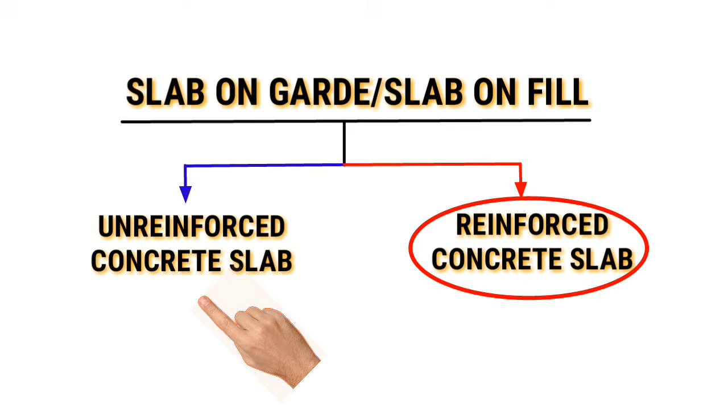Ang ituturo kong strategy sa inyo kung paano mag-estimate ng bakal para sa slab ay ang direct counting. Meron tayong two option para bilangin yung mga bakal. Pwede niyong bilangin ito per room o pwede naman i-consider na lang yung buong floor area kung typical yung design ng slab. By the way, ang spacing ng ating bakal para sa ating SOG ay 0.4 meter both ways at

10 mm in diameter. And take note, pagdating sa slab on grade, pwede kayong mag-splice kung saan niyo gustuhin. Malaya kayong makakapag-splice unlike sa suspended slab, beams, column, na kailangan pa natin sundin yung mga tamang location at i-identify kung saan yung tension or compression.

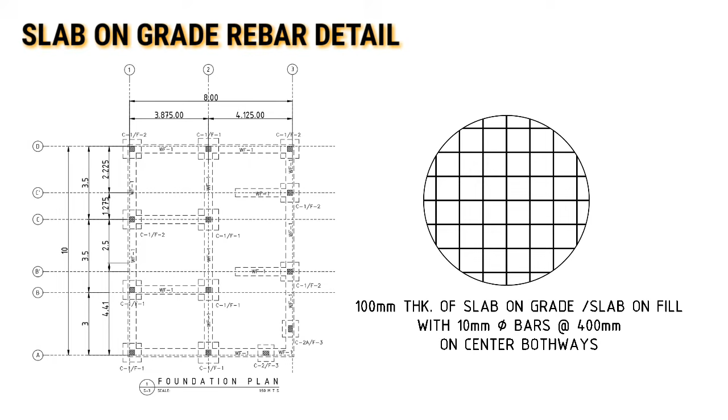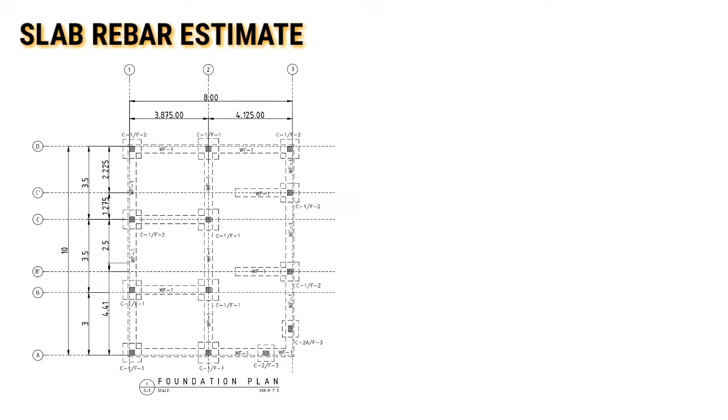Okay, let's consider the whole area, 8 meters by 10 meters. Bilangin muna natin kung ilan yung papasok na bakal sa bawat sides nito. Unahin natin yung bakal na parallel sa 8 meters. Number of rebar, that is equal to 10 meters divided by 0.4 na spacing plus 1. That is equal to 26 pieces.

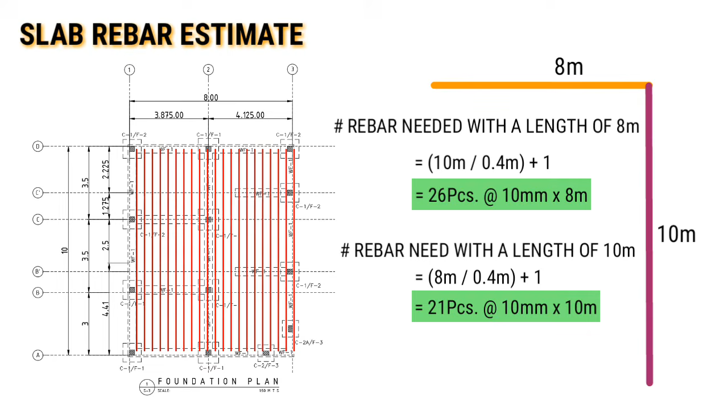Next, yung bakal naman parallel sa 10 meters. Number of rebars, that is equal to 8 meters divided by 0.4 plus 1, and that is equal to 21 pieces. Ang susunod naman natin alamin kung ilang 6 meters o 7.5 meters ang magagamit natin para mabuo natin yung haba na 8 meters at 10 meters.

Unahin natin yung 8 meters. Let's try 6 meters na bakal. So, remaining, that is equal to 8 meters minus 6 meters plus 0.4 para sa ating splicing length, and that is equal to 2.4 meters.

So, let's find out kung saan natin kukunin yung 2.4 meters na remaining natin. Here's the cutting list. 6 divided by 2.4, and that is equal to 2.5 pieces, so say 2 pieces. Meron tayong wastage length na 1.2 meter. For 7.5 naman, divided by 2.4, meron tayong makukuha na 3.13 pieces o 3 pieces. Meron naman tong wastage na 0.3 meter.

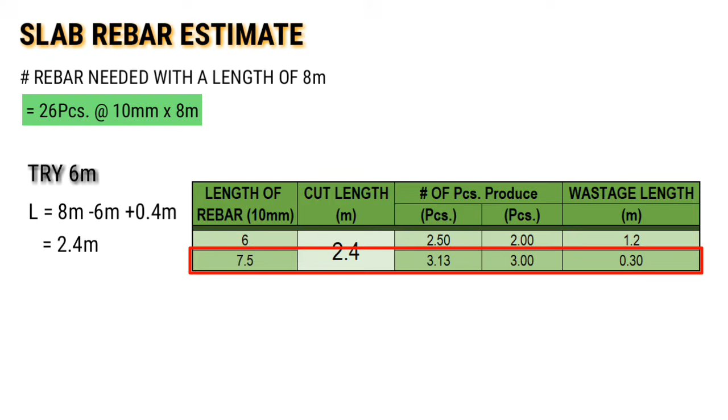Base sa result, sa 7.5 natin kukunin yung 2.4 meters na kailangan pa natin para mabuo natin yung 8 meters. Kung gagamit tayo ng 6 meters na buo at magdudugtong tayo ng 2.4 meters na kukunin natin sa 7.5, kakailanganin natin ng 26 pieces na 10 mm by 6 meters at 9 pieces na 10 mm by 7.5.

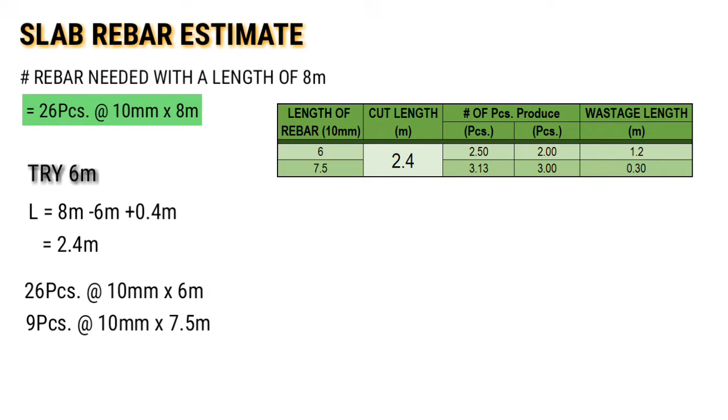Paano nakuha yung 9 pieces na 10 mm by 7.5 meters? Ganito yan. 26 pieces na 2.4 meter ang haba na kailangan natin idugtong sa 6 meters, i-divide natin sa 3. Dahil sa bawat piraso ng 7.5 meters, makakakuha tayo ng 3 pirasong 2.4 meters. So, 26 divided by 3, and that is equal to 8.66 pieces. Let's say 9 pieces.

What if 6 meters lang yung bakal na available sa inyong lugar? Ganito ang gawin natin. Instead of 26 divided by 3, magiging 26 divided by 2 na siya. That is equal to 13 pieces na 10 mm by 6 meters. But may wastage itong 1.2 meter, so pwede ninyo itong gamitin para sa dowel bar ng concrete hollow blocks.

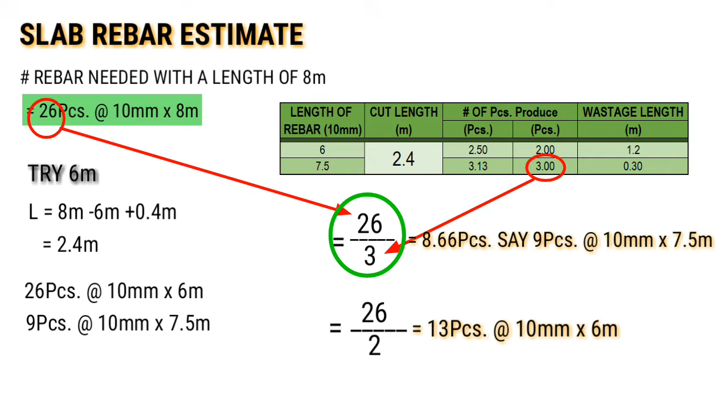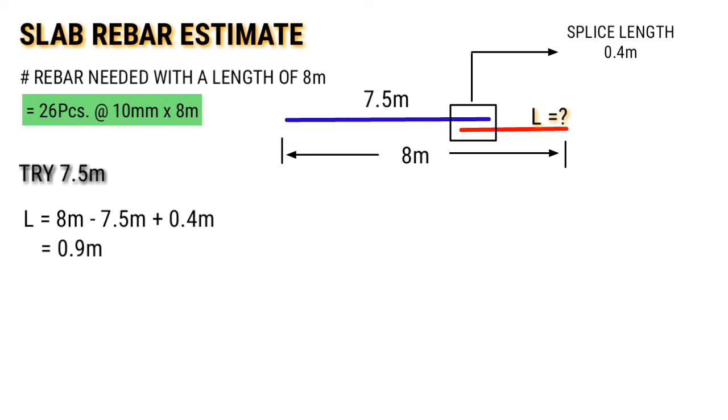Let's try naman kung 7.5 yung gawin natin buo. So, remaining, that is equal to 8 meters minus 7.5 plus 0.4 meter for splicing length, and that is equal to 0.9 meters. Kailangan pa natin ng 0.9 meters na haba ng bakal para idugtong sa 7.5 meters.

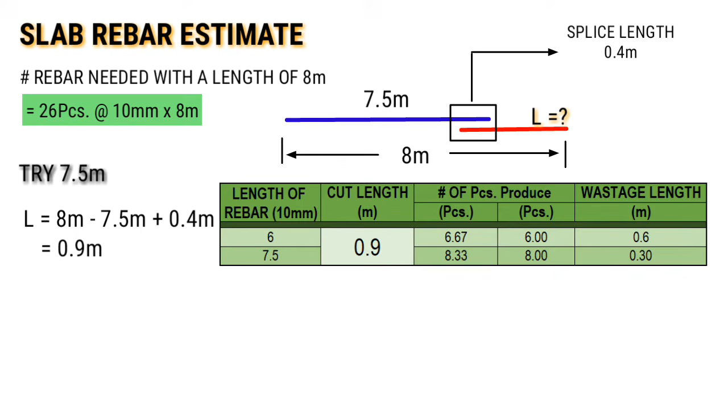Here's the cutting list. Base dito sa result, sa 7.5 natin, kukunin yung 0.9 meters na kailangan pa natin para mabuo yung 8 meters. Kung gagamit tayo ng 7.5 meters na buo, dudugtungan natin ito na 0.9 meters na kukunin natin sa 7.5. Kailangan natin ng 30 pieces na 10 mm by 7.5 meters.

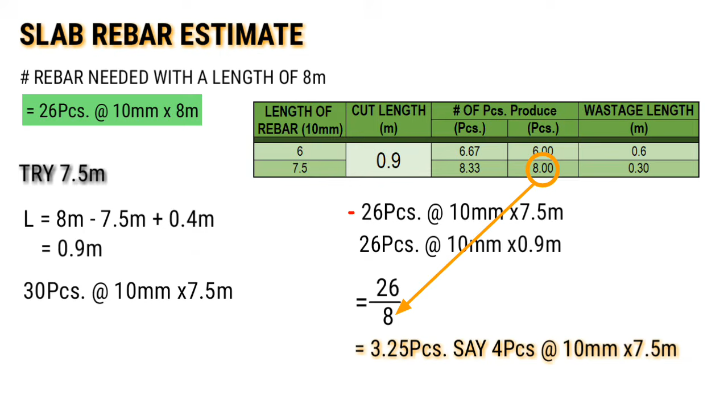Paano nakuha itong 30 pieces na ito? We have 26 pieces na 10 mm by 7.5 meters na buo at 26 pieces na 10 mm by 0.9 ang haba. So, 26 divided by 8, dahil sa bawat 7.5 meters na bakal, makakakuha tayo ng 8 pieces na 0.9 and that is equal to 3.25 pieces. Let's say 4 pieces. So, 26 plus 4 and that is equal to 30 pieces.

Ang tanong, paano natin malaman kung alin sa dalawang estimate na cutting list ang ginawa natin ang makakapagbigay ng mas mababang price? Para malaman natin kung saan tayo mas makakatipid, i-compute natin yung weight ng bakal.

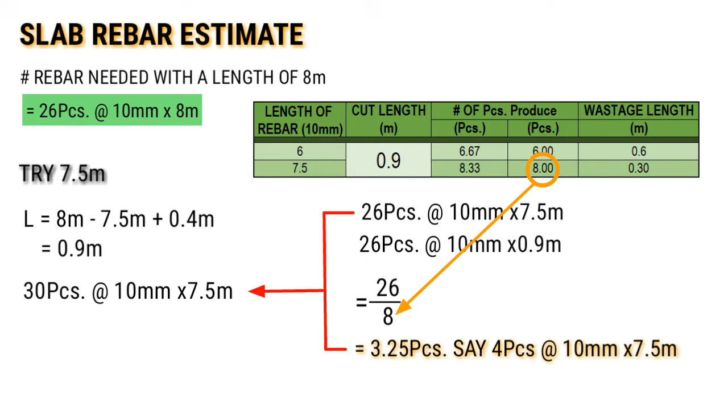So we have option 1 na 26 pieces na 10mm by 6 meters at 9 pieces na 10mm by 7.5 meters. Weight 1 equals 26 multiplied by 6 meters multiplied by 0.616, equals 96.1 kilograms. Weight 2 equals 9 pieces multiplied by 7.5 meters multiplied by 0.616, equals 41.58 kilograms. Total weight equals 96.1 plus 41.58.

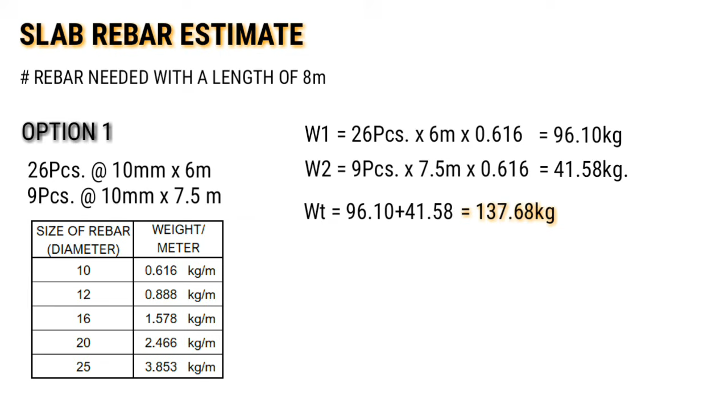Equals 137.68 kilograms. Dumako naman tayo sa option 2 na may 30 pieces na 10mm by 7.5. Total weight equals 30 pieces multiplied by 7.5 multiplied by 0.616, equals 138.6 kilograms. Base sa result, mas makakatipid tayo kung gagamit tayo ng 26 pieces na 10mm by 6 meters at 9 pieces na 10mm by 7.5 meters.

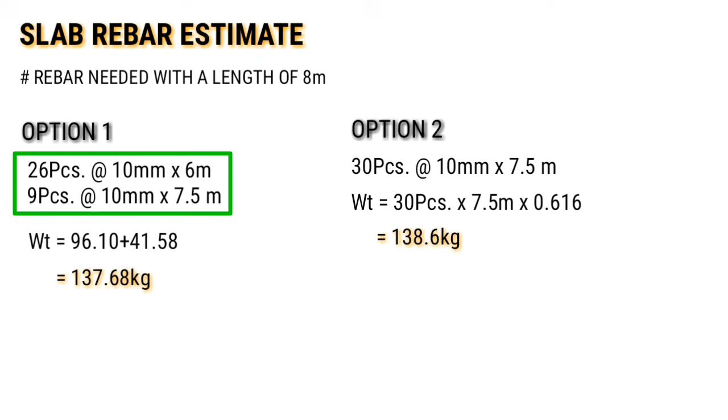Dumako naman tayo sa 10 meters na haba. Same process din yung ginawa natin nung una. Ito yung result, meron tayo ditong option 1.

Remaining length equals 10 meters minus 6 meters. Ibig sabihin, gagamit tayo ng 6 meters na buo plus 0.4 meter para sa ating splicing length, equals 4.4 meters. Itong 4.4 meters na ito yung idudugtong natin dito sa 6 meters para mabuo natin itong 10 meters na requirement natin. Ito yung ating cutting list.

Base dito sa cutting list, ang mag-govern dito yung 6 meters kasi mas maiksi yung wastage nito. So rebar needed equals 42 pieces na 10mm by 6 meters. Ang tanong, paano natin nakuha yung 42 pieces na yan?

Ganito lang yan. 8 meters, yung lalatagan natin ng 10 meters na bakal. Di-divide lang natin sa spacing ng ating rebars na 0.4 plus 1 tayo, equals 21 pieces. Kailangan natin ng 21 pieces na 10 meters ang haba.

Since ang available lamang na bakal is 6 meters at 7.5, magdudugtong tayo ng bakal. Para mabuo natin yung 10 meters, kailangan natin ng combination of 6 meters at 4.4 meters. Meron na tayo agad na 21 pieces na 10mm by 6 meters. Yung idudugtong natin, kukunin natin doon sa 6 meters.

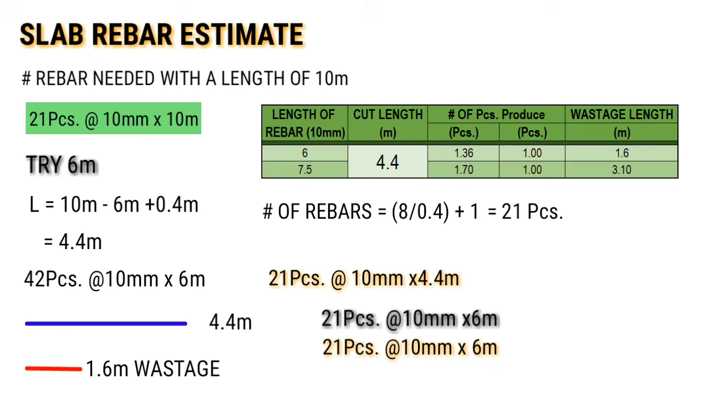Sa bawat piraso ng 6 meters na bakal, makakakuha tayo ng isang pirasong 4.4 meters. Meaning, kailangan din natin ng 21 pieces na 10mm by 6 meters para sa 4.4 meter na idudugtong natin sa 6 meters. So in total, we have 21 plus 21, equals 42 pieces na 10mm by 6 meters.

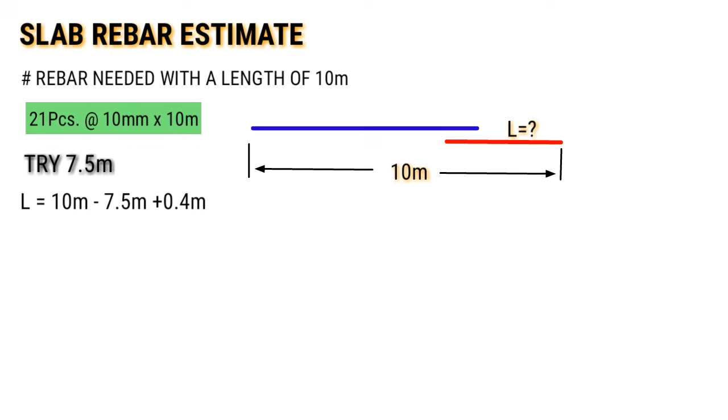Okay, try naman natin yung 7.5 meters ang gawin natin buo. Length equals 10 meters minus 7.5 plus 0.4 meter na splicing length natin, equals 2.9 meters.

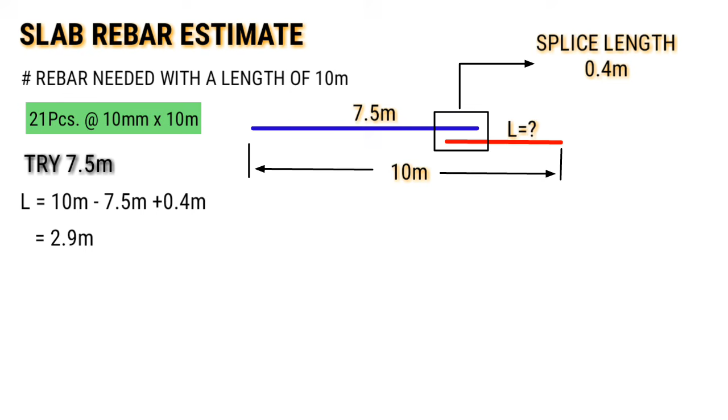So we need 2.9 meters para idugtong natin sa 7.5 meters. Ito yung cutting list. Base dito sa cutting list, ang mag-govern is yung 6 meters.

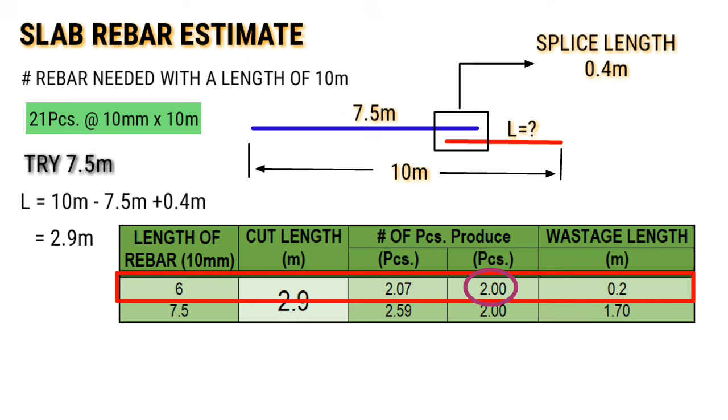Sa bawat piraso ng 6 meters na bakal, makakakuha tayong 2 pirasong 2.9 meters at may wastage itong 0.2. Minimal lang yung wastage nito, kaya dito tayo sa 6 meters. Rebar needed equals 21 pieces na 10mm by 7.5 meters, at 11 pieces na 10mm by 6 meters na idudugtong natin.

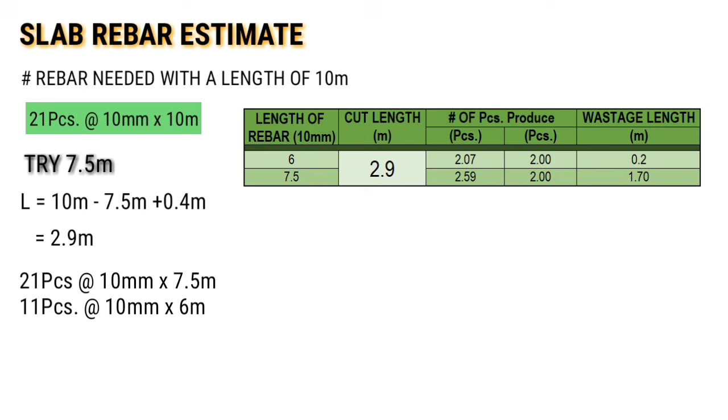Paano nakuha yung 11 pieces na yan? Sa bawat piraso ng 6 meters, makakakuha tayo ng 2 pirasong 2.9 meters ang haba. So 21 divided by 2, equals 10.5 pieces. So let's say 11 pieces na 10mm by 6 meters.

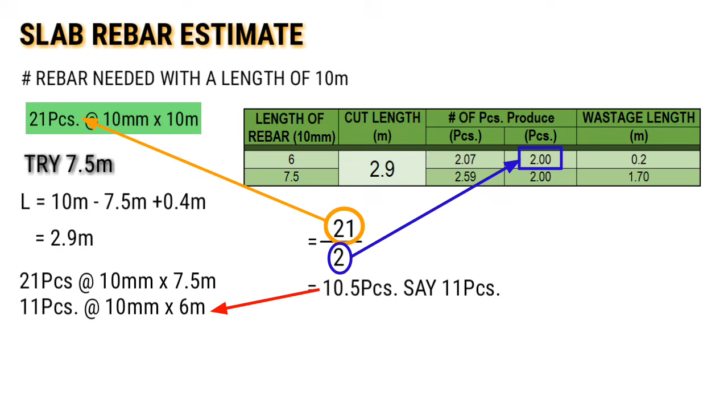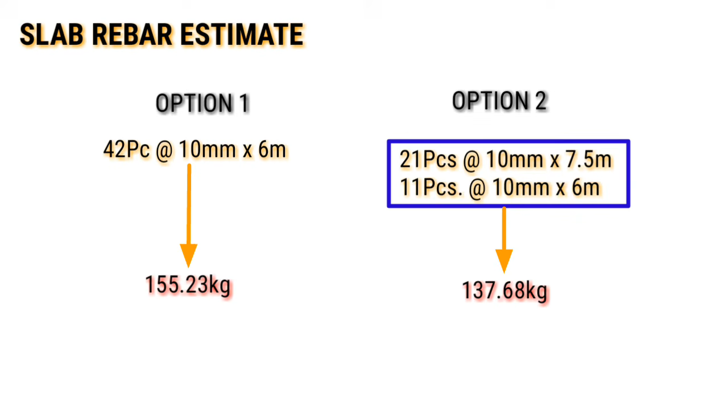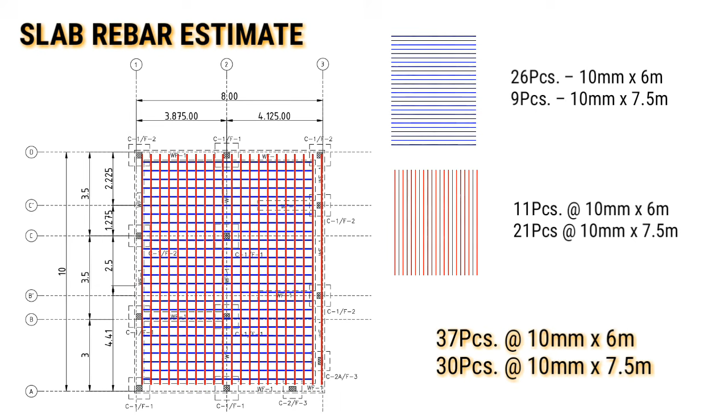Sa dalawang options na ginamit natin, mas makakatipid tayo kung gagamit tayo ng 21 pieces na 10mm by 7.5 meters at 11 pieces na 10mm by 6 meters. Okay, recap muna tayo. In total, kailangan natin ng 37 pieces na 10mm by 6 meters at 30 pieces na 10mm by 7.5 meters.

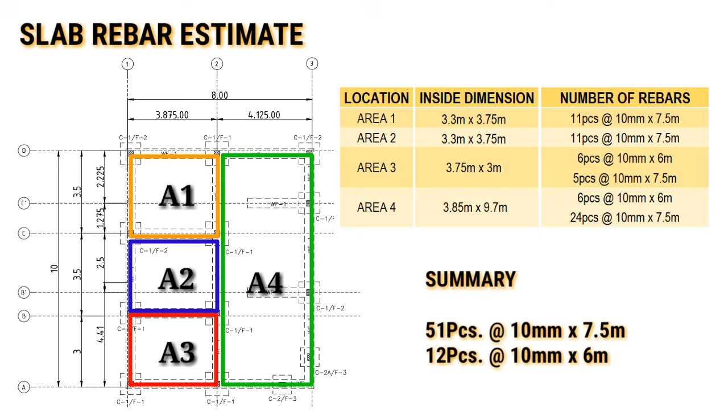Okay, kung may time kayo, pwede nyo subukan yung per area naman sa slab. Meron tayong area 1, area 2, area 3, at area 4. Hinati ko sa 4 na area. Sa summary, meron tayong 51 pieces na 10mm by 7.5, tsaka 12 pieces na 10mm by 6 meters. Kung kukomputin natin yung weight nito at i-compare natin doon sa nauna nating computation, halos magkapares lang naman sila.